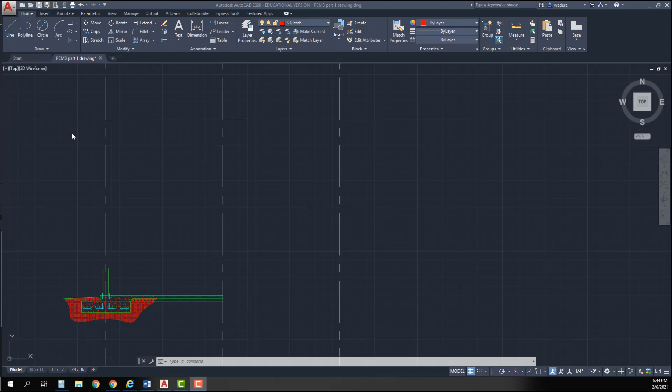In this part of the video, I'm going to concentrate on creating the rest of the west side section, or this side section, as we had indicated that we wanted to do.

For this, I'm going to need to look at page 139 to get my heights. If you recall, we are using the 20 PSF LL and the 30-foot width of building. So the first thing I see is if I look over in the B column, it says 14 feet, and that is where the rafter sits. So I'm going to go ahead and offset 14 feet from my floor slab.

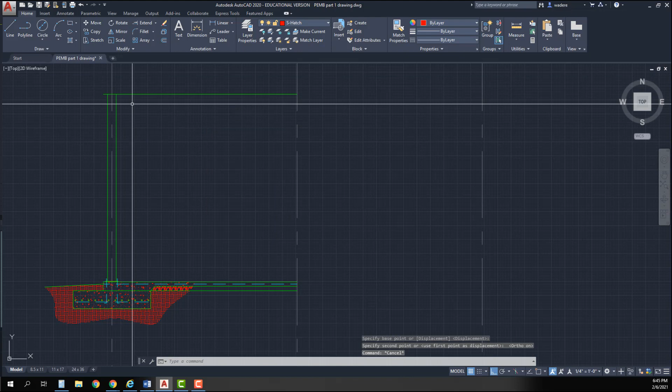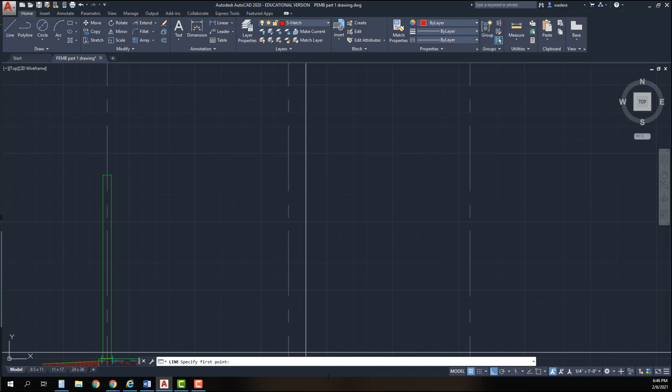I can go ahead and extend my column up. Now there's different ways that this can set on here. We are going to do it similar to the typical detail that we saw on page 135. The 14 feet is where our column is going to stay like this. And then from there, our rafter is going to come off of this point here, and it's going to rise.

Now, we have not determined what the slope of this rafter is. If I look back to the assignment on part 2, it says my roof slope is to be 1 to 12. If you don't recall what that means, it's going to go up 1 inch vertically for every 12 inches it goes horizontally. So I'm going to draw a line. I'm going to use my @ symbol, and I'm going to do 12 feet, comma, 1 foot. So I'm going to hit enter. And then once I get that done, I'm going to go ahead and extend that to my center point, because that's going to be the peak of my roof.

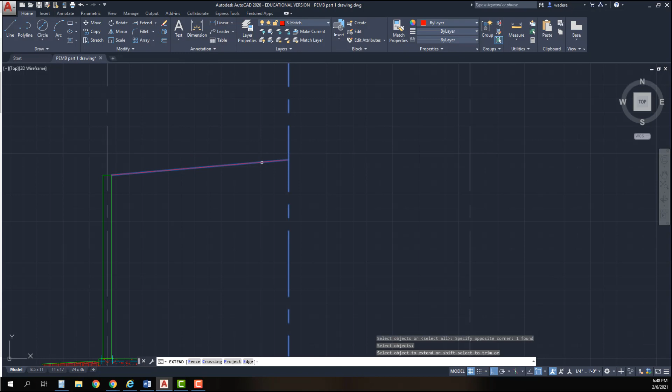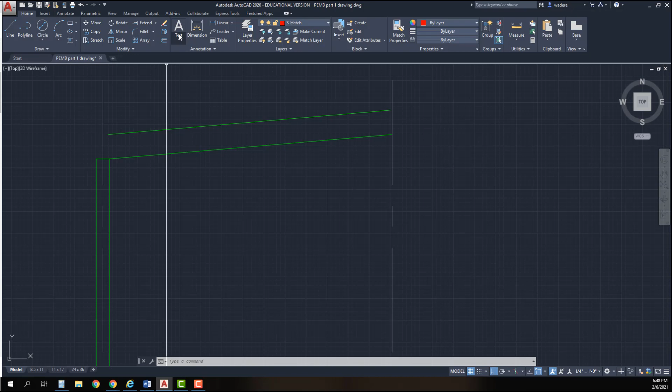Again, if I look back on page 139, it tells me that my rafter thickness is E, which is 14 inches. So I'm going to offset that line I just drew at 14 inches. Now I need to again put them on the correct layer. If I look back at the eave detail, you're going to see that basically these are going to connect. And this already does connect. So that is going to be my rafter.

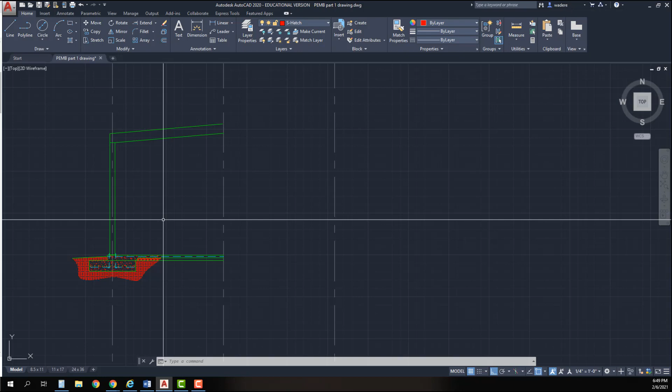From there, I need to add my girts into the wall. If I look back at the assignment, it says the girt is to be 5 inches wide and centered in the wall height. Girts can be shaped differently depending on the manufacturer of the building. Typically, they are either a Z-shaped or a C-shaped girt. If I look in here at my detail, my girt is going to go to the outside because my column sits inside.

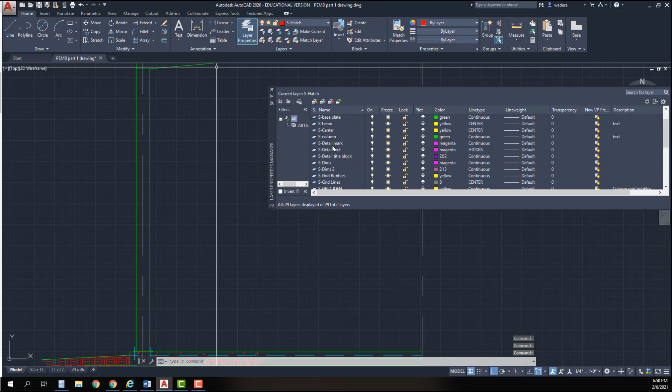Before I start drawing, I need to switch to my object layer so I don't have to keep matching properties. So I'm going to draw my girt as a C shape, but again, they have Z shapes and they have C shapes. So I'm going to start out with my line command, and I'm going to go 2 inches this way, and then I'm going to go 5 inches this way, and then I'm going to go back up 2 inches. And again, this is just kind of symbolic, so I'm going to offset those lines at 1/8 inch to show some thickness for that girt so it shows up.

And close that off, close that off, and trim out the corners.

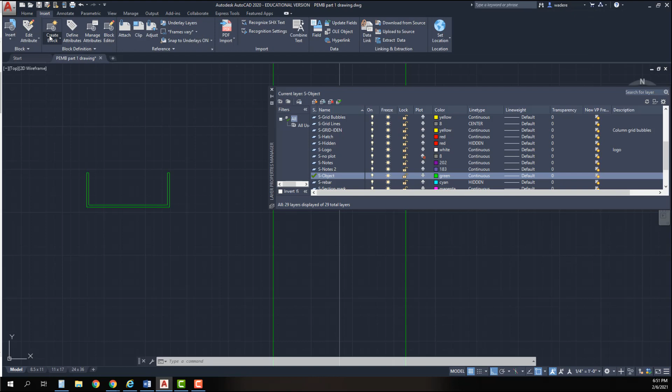Now, I'm going to go ahead and make this into a block so that I don't have all of these individual pieces. If you don't remember how to do that, if you go to Insert and you go to Create Block, it is going to bring up the block definition, and I'm going to type in girt, and I want my base point to be the bottom right hand corner, and I'm going to select my objects, and I'm going to say OK.

So it said it wanted the girt to be centered in the wall. So I'm going to move my girt, and I'm going to pick the midpoint here, and I'm going to go to the midpoint of this wall because that's on the inside, and then I just need to move this to the outside. So now I've got my girt added in there.

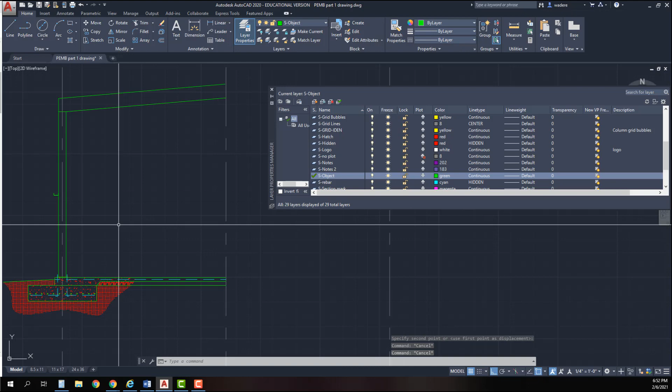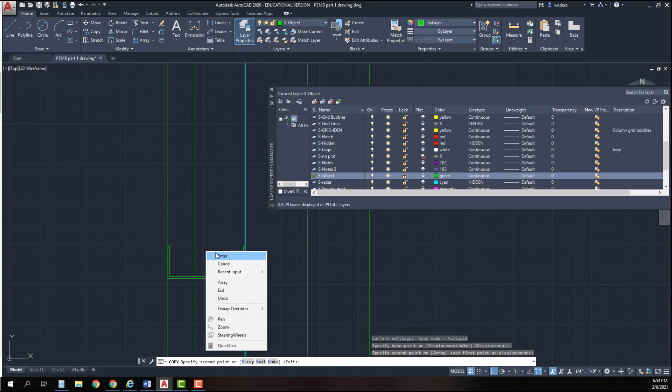I'm going to come back down here to the bottom, and now I'm going to actually put my wall panel on. It says my wall sheeting is to be 2 inches thick. So I'm going to copy this line from the corner of my girt there to the corner of my girt there, and I am going to offset that 2 inches.

I have my sheeting, and now I need to come down here and show my base angle. If you look at the detail on 135, it kind of makes an irregular shape.

Basically what I'm going to do is first offset the edge of my concrete a small distance, so there is some separation. I'm going to use 1/8 inch just so we can see it, especially when we do our enlarged view. Again, I'm going to use the same thickness for this that I did for my girt, offsetting 1/8 inch again.

Then you'll see that it comes down, and again our sheeting is going to come down about that distance. This does not have to be exact, so I'm going to draw that, and then off of this I need to have my base angle come off of it.

So again, I'm going to offset that bottom piece that I just did, the 1/8 inch, and offset it again 1/8 inch for the thickness. Now I can connect these two with my fillet, set with a radius of 0, and then it's going to come about halfway in here, and again I'm going to offset it 1/8 inch.

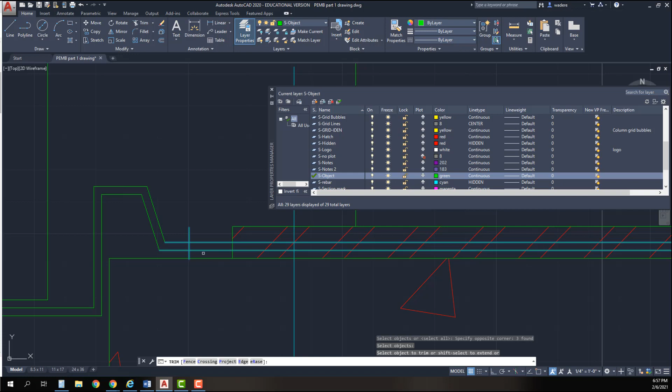Next, I need to close off the end, so I'm just going to copy the end of my plate over a certain distance. I'm going to use my trim command to clean up the end of the base angle.

At this point, you need to create another block for the base angle. Because of time limitations, I'm not going to do that, but you should do that on your drawing. We have our base angle, we have the end of our sheeting, and we have our wall girt.

Now we need to work on the top of our rigid frame. We want to go back and look at our detail and see how everything is put together. Right here we have where our eave strut is going to go and where our rafter is.

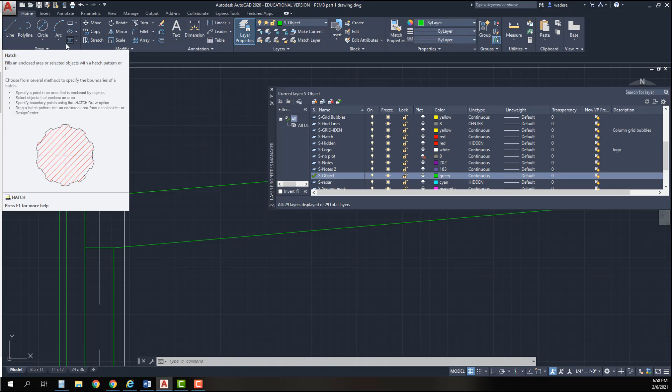We know that our eave strut is the same height as our purlin. So I'm going to connect my panel to the top of my rafter. My purlins are going to sit on top of my rafter, and they are 8 inches high, so I'm going to offset the top of my rafter at 8 inches.

Next, I'm going to connect the panel to the top of the purlin where my eave strut is going to sit. My eave strut sets right here at the end of my purlin line, and again I'm just going to create it by using my offset, using 1/8 inch dimensions. So I'm going to offset the top, the side, and the bottom, and use my fillet to clean up the corners.

Then it needs to have some vertical pieces to make the C shape. I'm going to offset that about 5 inches, and then connect it at the top.

I'm going to trim it as needed to create my eave strut, offsetting it about 1 inch in each way so that I can create the C shape, again using 1/8 inch offset. Then I will clean up the detail, and then I need to do the same thing at the bottom of the eave strut.

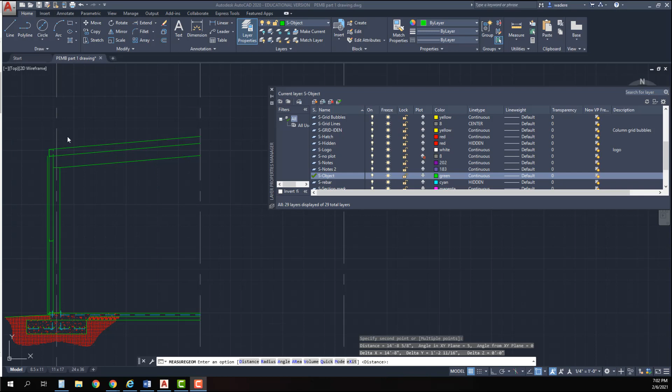We want to have one that's fairly close to the ridge, but not directly on the ridge. I want it to be at least about 1 foot or so off of that. So typically what I'm going to do is 3 feet across, maybe a little less, probably 2'6".

I'm just going to use my offset. I'll draw a line from the top of my eave strut, offset that 3 feet, and then add another purlin closer to my ridge point. I'm going to offset my center ridge by 1 foot to get my purlin closer to that ridge.

My purlin is basically the same thing as my eave strut, so I'm just going to copy that to those center points. I need to offset the back side of it by 1/8 inch to get it completed.

And then I will continue to copy it to the rest of my locations, and then I will delete my construction lines that I created to place my purlins.

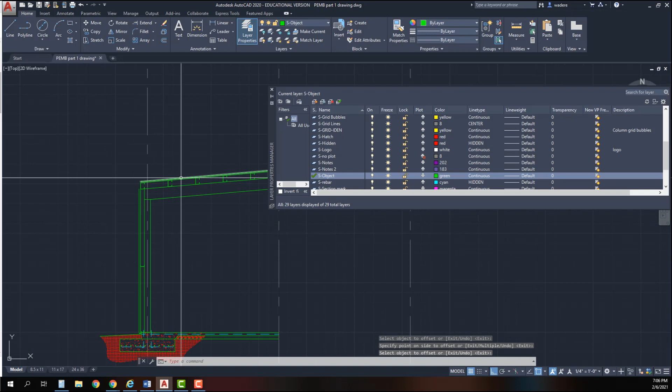I need to go clean up the end to where it meets the ridge on the center point. It needs to come out past the edge of my building, so I'm going to zoom in there and take a look at that.

I want it to come out at least even with my wall panel, but my wall panel doesn't go all the way up. So I'm going to draw a line across here, and then draw a line from the edge of my wall panel up to connect my roof panel. And then I'm going to join the corners here.

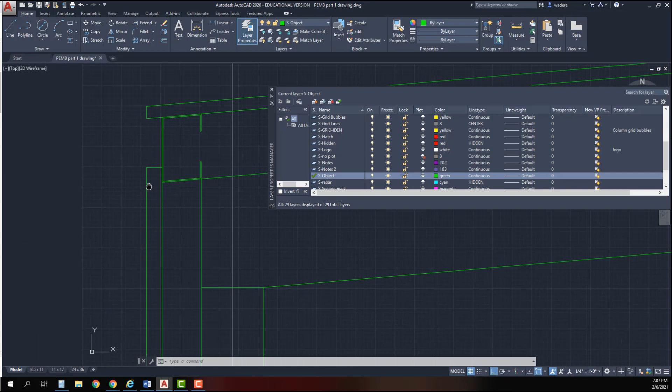According to the instructions, we have a 7 inch by 7 inch rectangular gutter. If you look in the book, your gutter has a different configuration. Again, they're all different depending on manufacturers, but for ours, we're going to keep it simple and just draw a 7 by 7 gutter.

I'm going to use my line command. I'm going to come down 7 inches, go to the left 7 inches, and then go back up 7 inches.

And I'm going to use my offset to offset it again 1/8 inch to each side, and close off the top pieces.

I'll clean up my corners, and then I should create a block of my gutter. I did not have you create a block of the eave strut or the purlin, but you need to do that. The next thing is we need to move the gutter into place.

It sits down below the edge of the roof and fits tight to the wall panel. And then we have to create the flashing that goes between the roof panel and down into the gutter.

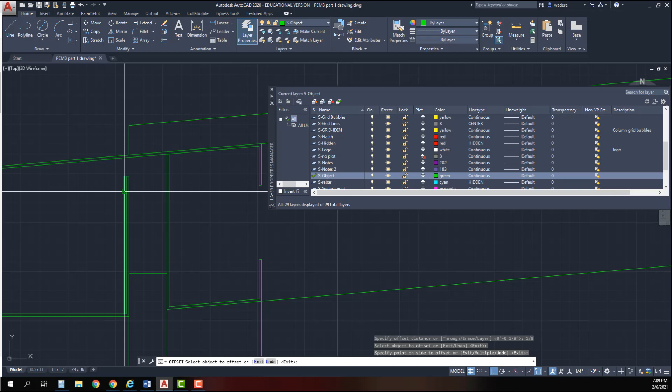So again, I'm going to come in and create my flashing. I'm going to extend my lines from the edge of my gutter, and then offset the vertical line 1/8 inch. And then I'm going to connect those together to form my flashing.

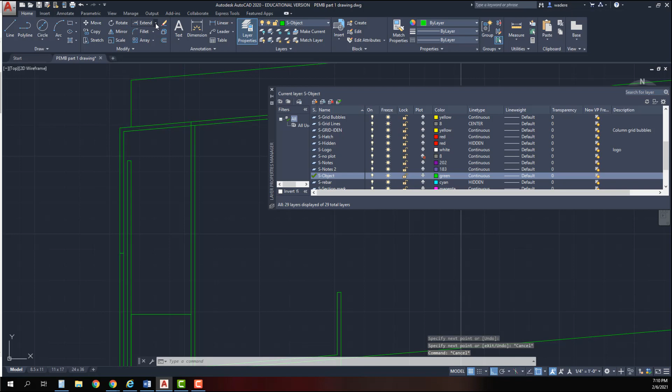It needs to have a piece that comes down a certain distance so that water cannot get back up through there, so I'm just going to trim it off right there and get rid of the line I drew. Again, there would be some other pieces in there, but for our purposes, this is all that we need.

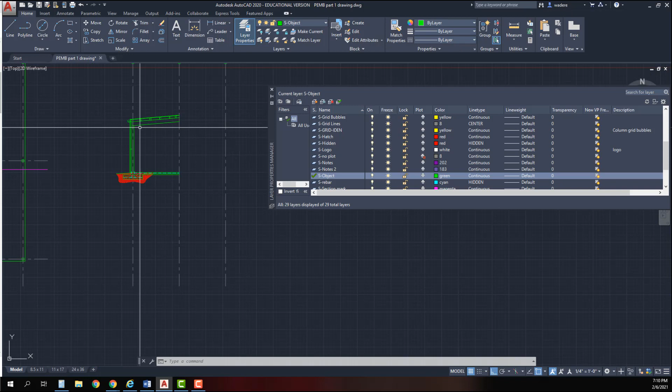So as a review, we have completed the base, we've completed the wall girt, and now we've completed the top of our rigid frame, including our gutter. In the next video, we will cover the enlarged eave strut detail.